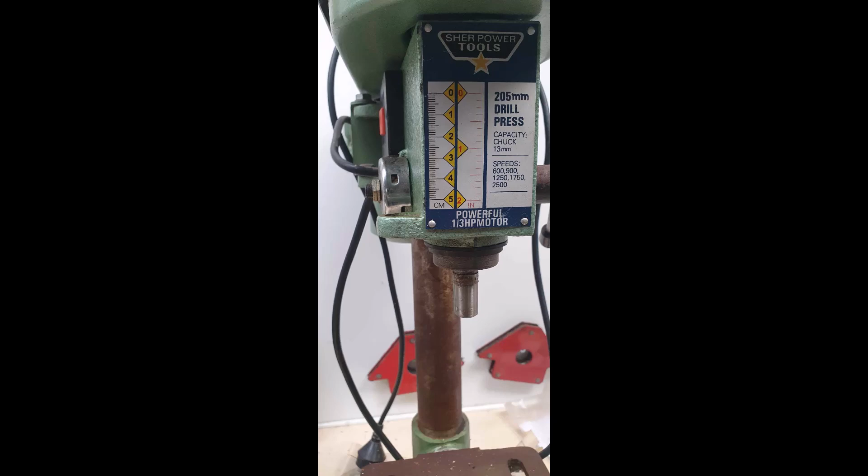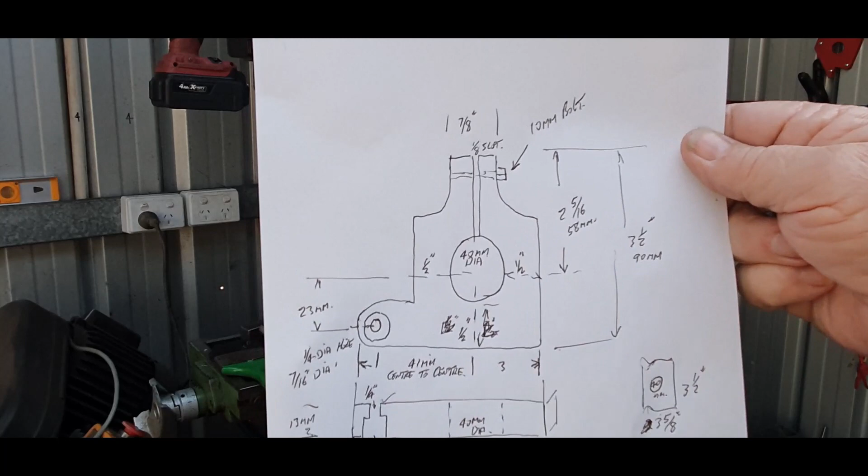All right, what we're doing here is a little job I've got. It's just a bracket I'm making up, which goes onto a drill, and that's 40 mil ID, and that'll be a thing where a bolt comes out for a height adjustment, which goes onto, as I said, a drill press.

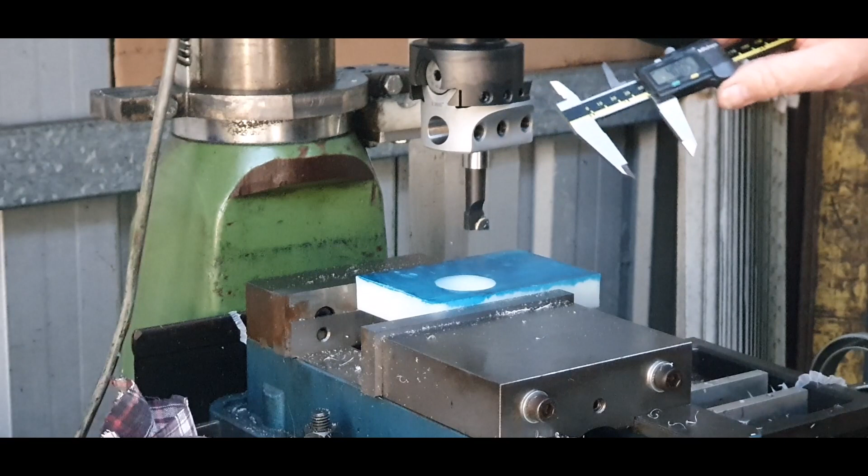40.05 mil, and I was chasing 40, so I think that's a go up on that one. What we're going to do is take it back, then go over here and find another hole over here.

Now at the moment I've got a 6mm end mill in here, yes, it's in a chuck. I've only got one slot to put in, so I thought I'd give it a whirl instead of changing everything around 20,000 times.

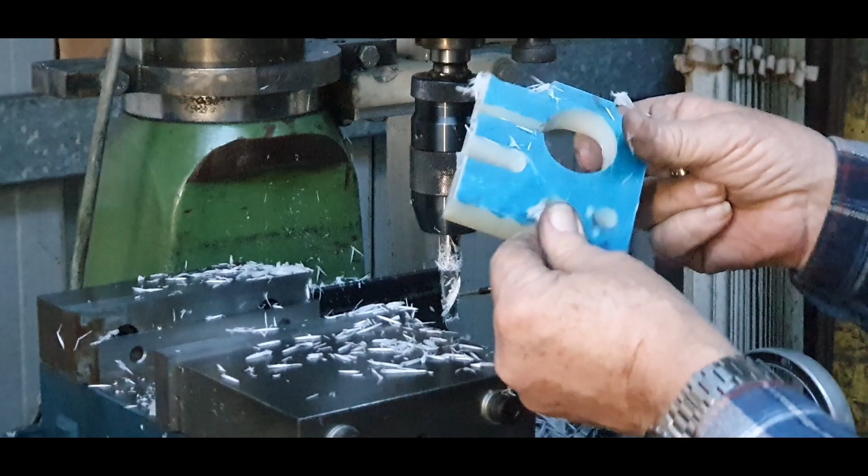Just needs cleaning up now, and yeah, well, we're getting there. I still have to chop this piece out and then trim all that back, and you'll see what it looks like.

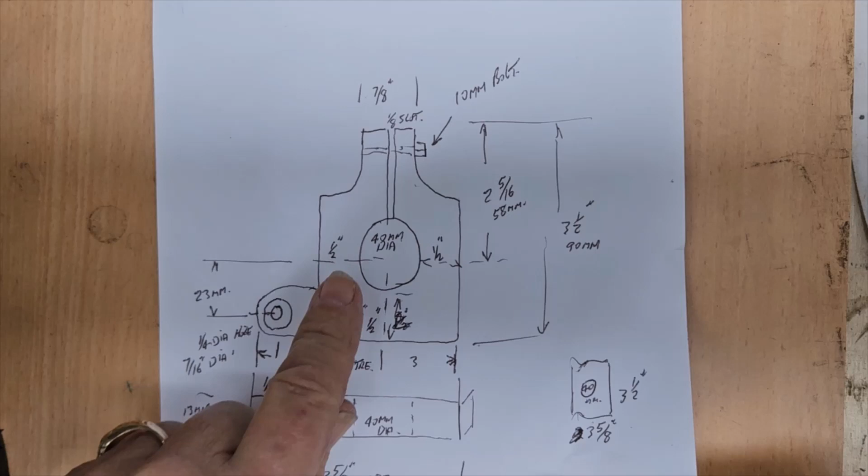Alright, this is just to show the actual drawing again. What it was, as you saw, is a big piece of the nylon type material there, and this is actually fitting underneath. It's a drill press, and it's only a small one, and that is a bracket which clips underneath or above the chuck, sort of thing.

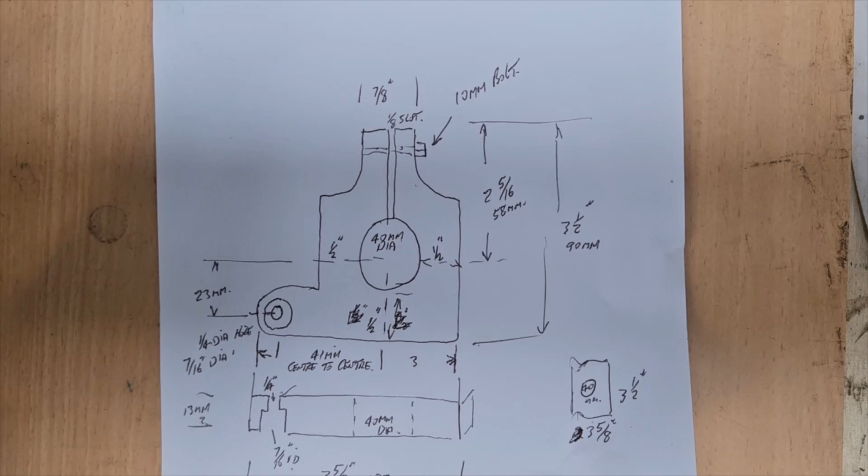Now there's a half inch I've got, but it's actually 7/16 bolts come up here, and that becomes the actual height adjustment. Now you saw what I was making, so this is pretty well the finished product now. Now what that does, if you can imagine this part here, that is sitting upside down, of course.

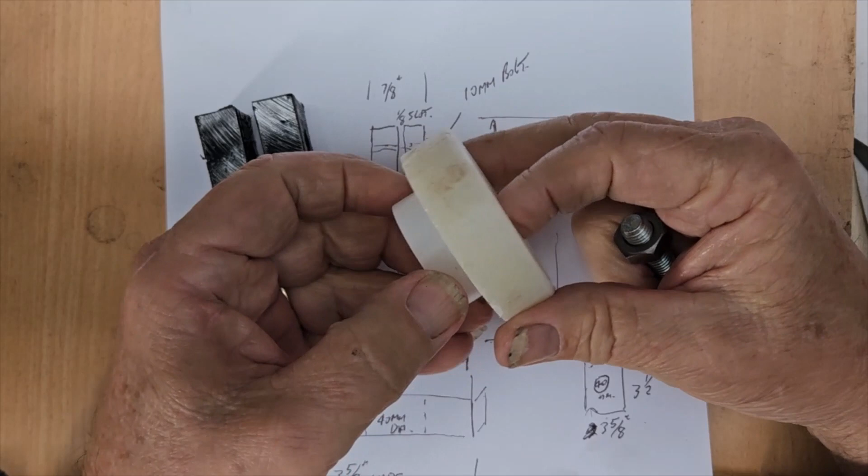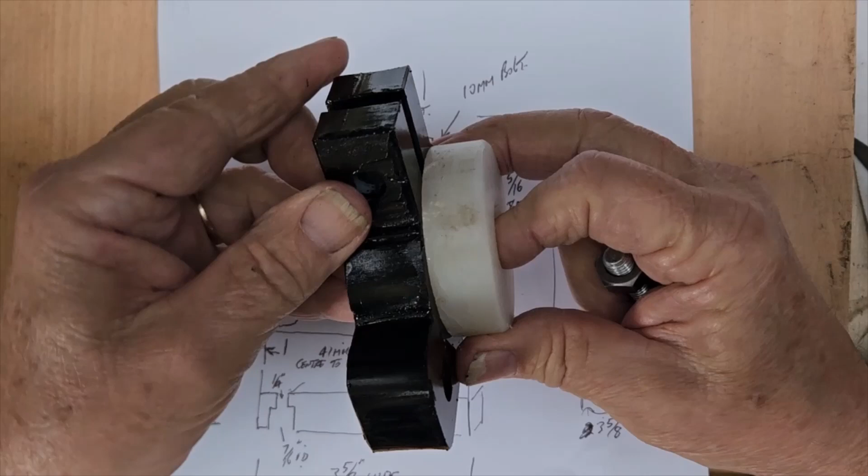So what happens is this particular unit, because it goes on like so, that way, so that will actually fit up like in here. So if you can imagine, that's on the bottom, and then when that bolt is clamped through there, that locks onto it. So it only needs a slight pressure.

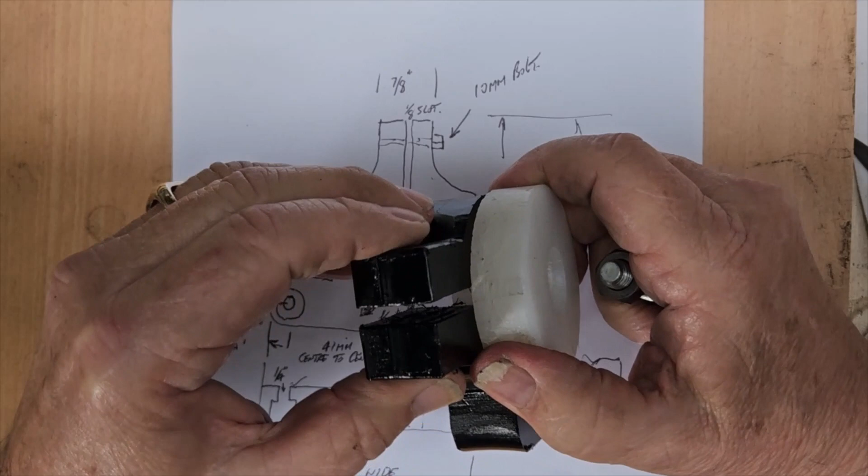We're going to be using 10mm bolts, which will go straight through there. So yeah, so the people who wanted it, they'll be nice and happy. So just by holding it, there's no way we can move that. So that's actually a finished product.